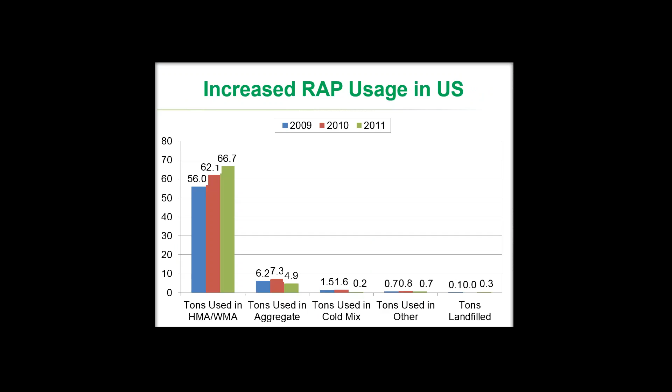The question that, as pavement professionals and decision makers, we need to consider is whether a one-time recycling of that material into the asphalt mix stops us from continuing to recycle that mix back into warm mix products as we talked about. Can I run that material in 10, 15, 20, 40 years back through an asphalt plant without problems? That's one of the main considerations we need to look out for in those few cases where recycling is not the best idea.

There is work out there looking at substitutes for petroleum asphalt, and I think a key thing is that in most cases these are not substitutes, but they're being looked at as asphalt extenders - things we would mix with the asphalt to improve the properties and reduce the amount of petroleum in the asphalt binder.

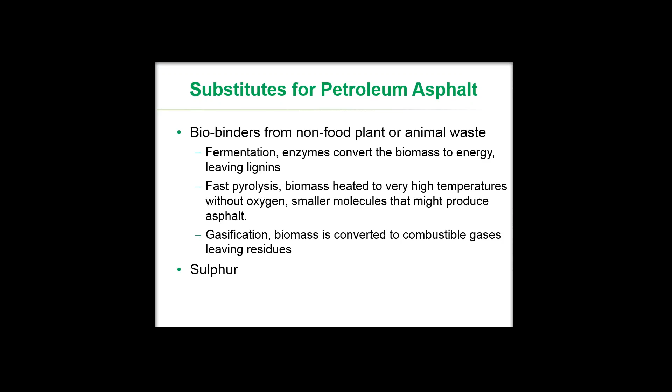These primarily are biobinders from non-food plant or animal waste, using fermentation, fast pyrolysis, and gasification processes. Each has its own environmental impact. There's a lot of work going on out there, so this is something to keep an eye on in the future. There's also been work off and on over the last 20, 30 years with the use of sulfur as a substitute or extender for petroleum asphalt.

So some strategies for improving the sustainability of asphalt mixes - and I've put these in sort of my opinion of rank order, other people may have other opinions - first of all, increase the material performance and the time between future maintenance and rehabilitation treatments. If we can extend the life of an asphalt pavement or mixture through materials design and particularly construction quality, that's an easy way to reduce the impact.

If we can increase the life by 20%, that means we reduce the amount of material we're using by about 20% as well over a life cycle.

The next thing we can do is work to reduce the amount of virgin asphalt binder, aggregate, and polymer in the mix. Use the polymer where it really has a benefit. Use more RAP. Look at recycling tire rubber where it helps us with performance, where we have a net benefit. Consider the use of RAS. Again, use additional additives where the performance increase warrants the additional environmental impact.

As Tom talked about aggregate, the same is true for asphalt mixes - reduce the materials transportation. Use locally available materials where we can get similar performance, or where we can find a way to offset a reduction in performance through our pavement design or how we're handling and designing the materials. Also look at in-place recycling, which eliminates most of the materials transportation impact.

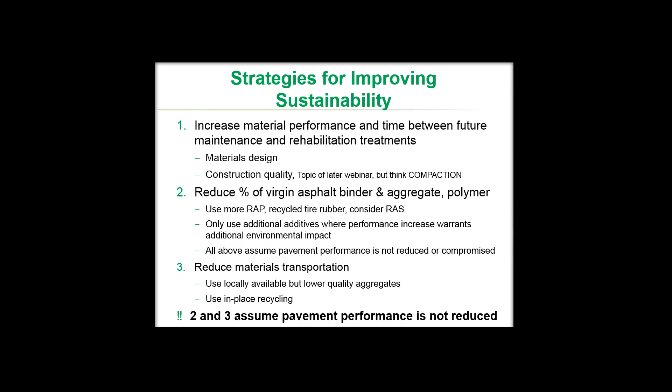Some real-world considerations: understanding the sustainability goals of the organization. An example was given for the Illinois Tollway - they set some clear goals for what they were trying to do. There's a number of impact categories, environmental impacts, that you can consider.

Once you define that, then look at the trade-offs to reduce impact, taking into account that life cycle consideration. So we need to consider the environmental impacts of material decisions, the effects on performance, the replacement frequency, transport distances, and our ability to almost perpetually recycle many of those materials.

A question to ask: are our current specifications limiting the use of lower impact materials? Are we really getting an improvement in performance, or are we setting high specifications for some of these materials where the overall impact on performance is not that great, but we could actually have a pretty good impact on sustainability?

So reviewing specifications and design procedures to look at where you can change those with minimal impact on performance, but potentially allowing greater use of recycling and locally available materials.

Our next subject is going to be pavement design, looking at pavement design so that we can make the best use of the lower impact materials without compromising performance.

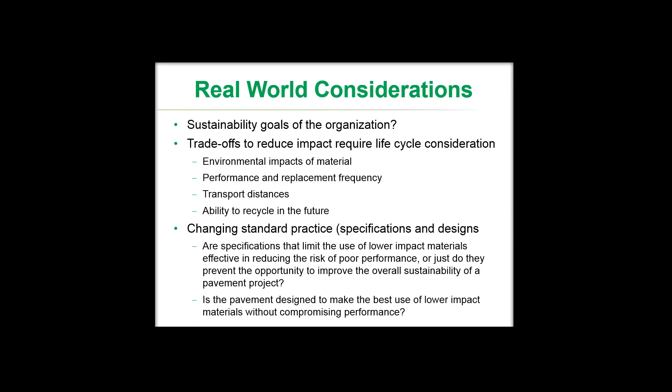An example of this, not necessarily a typical example but just an example, is a state agency with a mix design procedure intended to minimize the risk of rutting by keeping the binder contents low. The question evaluated here was: what's the impact of changing the gradation and increasing the binder content in the mix design to increase the cracking resistance, and therefore increase the amount of time between needing to do preservation treatments or rehabilitation?

So performance-related testing was used to evaluate the stiffness, the fatigue cracking resistance, and the rutting resistance of using the same materials but changing the mix design.

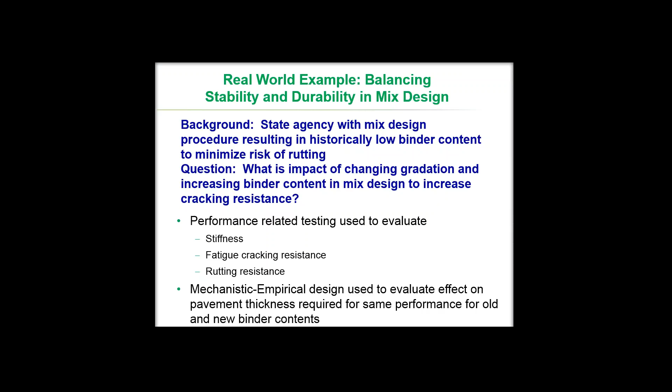Mechanistic empirical design was used to evaluate the effect on pavement thickness required for the same performance, comparing the lower binder content under the old mix design system with a somewhat higher binder content under the new mix design specifications. The result was that the risk of rutting was increased, but it was way over-specified previously, and the risk of rutting was still acceptable with the increased binder content in general.

However, by increasing the fatigue resistance of the material, we could reduce the thickness and still get the same cracking life. So the question was, what's the net impact of increasing the binder content but being able to design a somewhat thinner pavement? By increasing the binder content from 5 to 5.5%, the mechanistic design indicated that we could reduce the thickness.

There were a number of examples run, but for an example pavement, the thickness went from 4 inches (103 millimeters) to about 3 and a quarter inches (84 millimeters) - about an 18% reduction in thickness. This overall reduces the amount of mix needed, and even though we increased the binder content, the total amount of binder needed was reduced from 44 cubic meters to 36 cubic meters. So this is the kind of analysis where you may get a result you were not necessarily looking for.

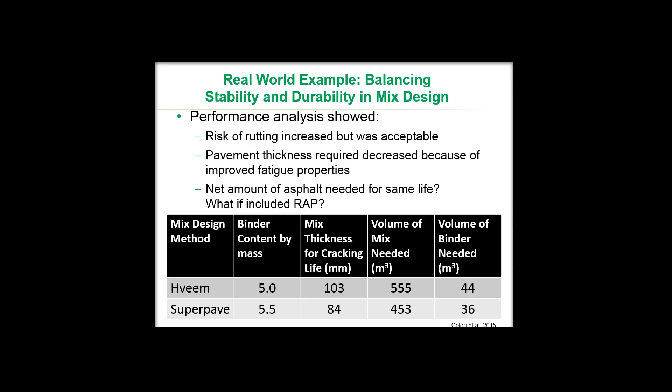Some future directions and emerging technologies: we're expecting a reduction in material quantities used per year through improvements in mixture design and construction practices, new technologies like warm mix, and the strategic use of polymers, rubber, and other modifiers, increased use of performance-related testing and specifications to fine-tune these mixes, greater use of recycled materials particularly RAP, greater use of locally available pavement materials, and longer term, the potential for use of alternative binders.

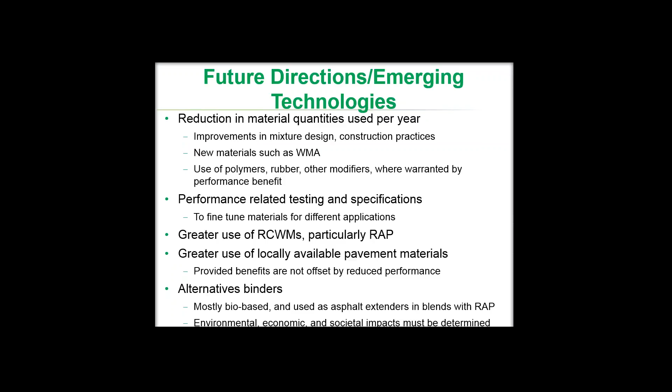Switching subjects to pavement design. Some of the key issues are surface performance, particularly smoothness, which affects vehicle fuel use and maintenance, and has very big cost implications as well as environmental implications. We need to consider life cycle smoothness, not just initial smoothness, and the importance of smoothness increases as the amount of traffic using the road increases.

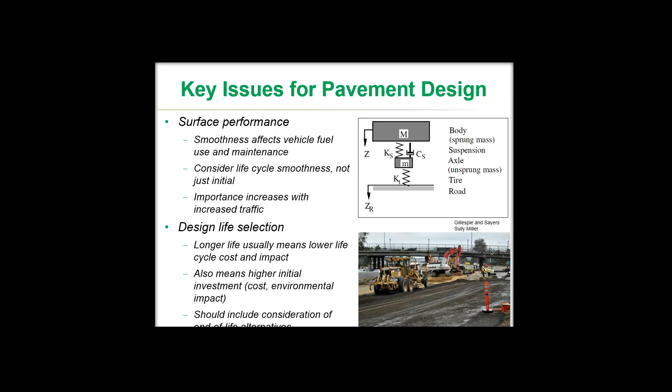Another issue is design life selection. Longer life usually means lower life cycle cost and impact, but that should be evaluated depending on the context. It also means a higher initial investment in terms of cost and environmental impact, and we should consider some different end-of-life alternatives as well - what are we going to do with the pavement when we reach the end of that life?

Pavement type selection is an issue. It impacts every phase of the pavement life cycle. We need to look at the relative sustainability of different pavement types, which depends on the location, the traffic, and the available materials. We also need to look at the interaction of construction and material selection with pavement design, considering designing so that we can maximize the probability of getting high-quality construction.

There will be some discussion about work zone traffic delays, and then integrating our pavement design with our construction quality requirements, and thinking again about how do we account for end-of-life recycling strategies in our initial pavement design.

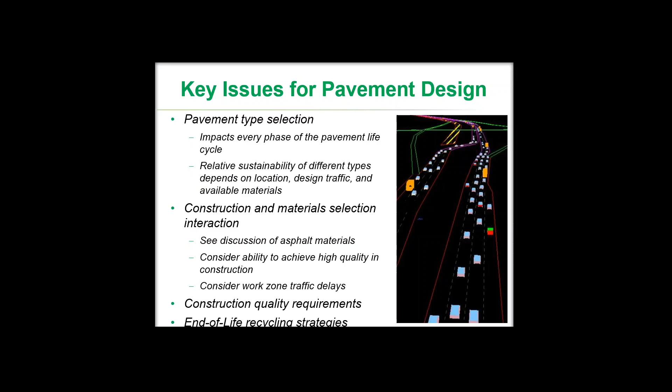Mechanistic empirical design methods really give us a leg up on being able to do relatively rapid evaluation of all the different things we've been talking about with regard to materials as well as pavement design. We can characterize materials with increased recycled content, lower environmental impact, changes in mix design as in the example we just looked at, use of locally available materials - characterize those materials, run them through the mechanistic design, and get a first idea of what the impact is going to be on performance.

We can similarly characterize materials with improved construction quality, such as better compaction, reductions in variability, and making sure we get good bonding between the layers, and evaluate those impacts of changes in specifications. We can also look at different kinds of pavement structures and fine-tune our pavement structures for the specific climate, traffic, and subgrade we're dealing with on a given site.

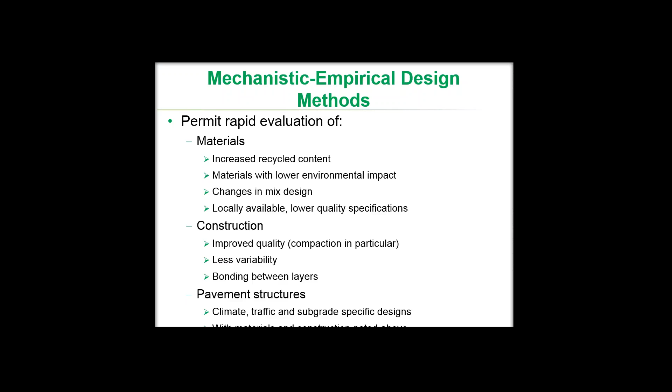One of the things we should consider has to do with pavement life selection. This was an analysis looking at a current 20-year design standard going to a 40-year design standard, and just for analysis purposes, going to a 100-year pavement. This is some of the analysis that can be done looking at things that have a higher initial impact, and then trying to understand how long it takes to get back to the same point in terms of impact as if we had done something with a lower initial impact.

In this case, the 20-year design had a lower initial impact, but the analysis showed more frequent maintenance and rehab resulted in, over the longer life cycle, a much higher environmental impact. The 40-year design had a reduced environmental impact, shown in red, and that paid back after a relatively short amount of time. The higher initial impact of the 100-year pavement didn't really get paid back until way out in the future, which decreased the chance that we were actually going to get a payback.

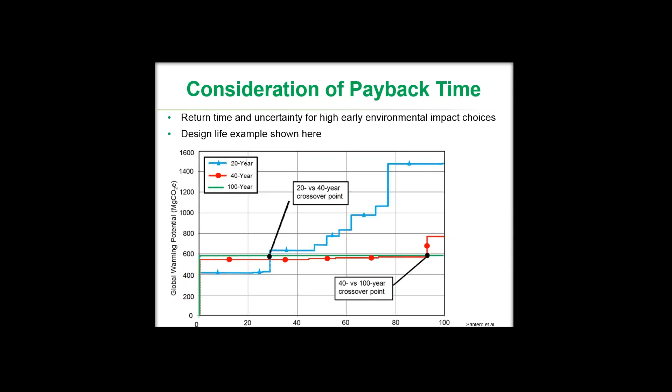So the point is that different changes can be looked at in terms of initial impact versus life cycle impact. The overall process for considering sustainability in pavement design is outlined in the reference document - I'm not going to go through all the details. The basic first part here is basic mechanistic empirical design.

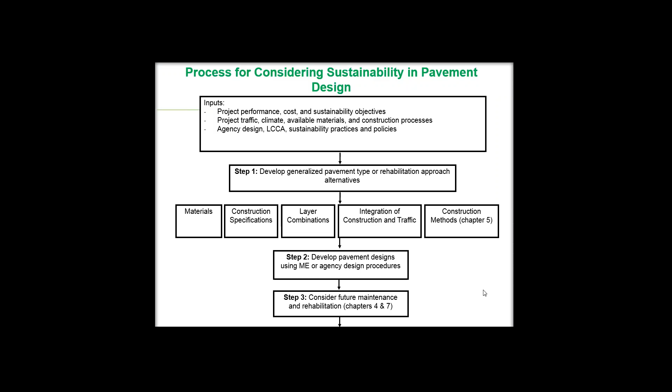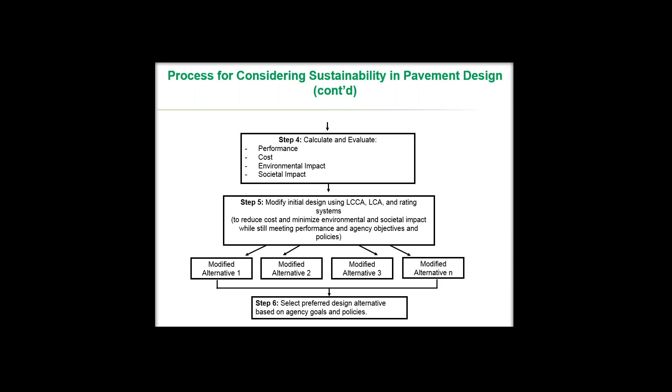The next step is to, based on the structure that you're evaluating, determine the life cycle cost, select your pavement design, and then go through alternatives for optimizing the environmental impact. The general recommendation is similar to what the Illinois Tollway was shown to be doing: focus on your cost first and then optimize your environmental impact to arrive at the final solution.

There's a number of different pavement types, I'll just go through a few of these. All of these are alternatives that can be considered, each should be looked at in terms of potential trade-offs. We have full depth asphalt, where all of the layers are asphalt bound on a compacted subgrade, versus a conventional asphalt pavement, where we're using granular layers to help carry the loads. An example of trade-offs: full depth asphalt uses a higher impact material for most of the structure, but we can potentially reduce the overall thickness of the pavement substantially, which may result in a net benefit in terms of environmental impact.

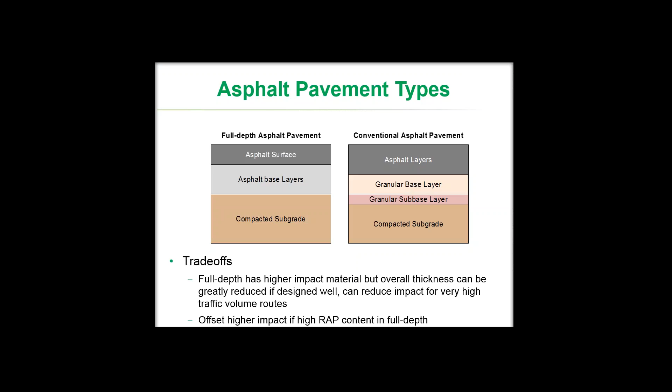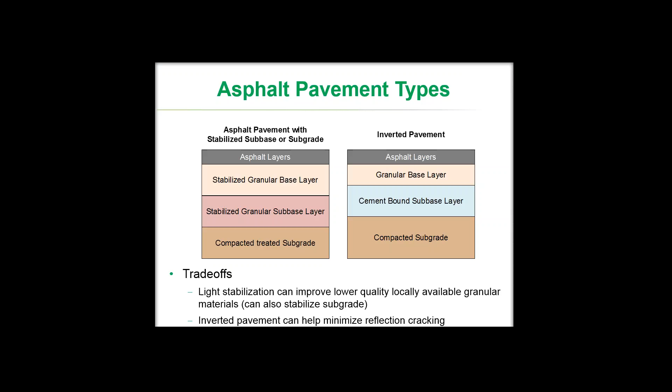If we're using full depth asphalt as an example, we might be able to offset a greater amount of that impact by using a high RAP content in the deeper layers of the structure. Some other types of pavements we can consider: light stabilization, as shown on the left, which can substantially improve the performance of the aggregate layers under the asphalt. We can cement treat the materials and then use a granular base, called an inverted pavement, used quite a bit in Southern Africa and some other locations.

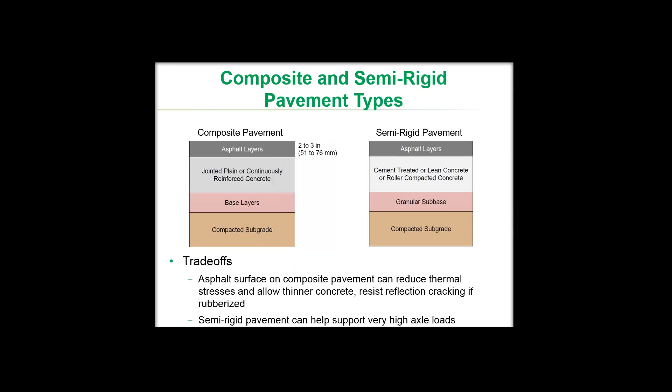We can use composite pavement as a new pavement structure, where we build a concrete pavement and then use asphalt on the surface, which can help us thin down the concrete. This is the subject of research in the SHRP R21 project. Or in many countries, or cases where we don't have a lot of access to good crushed aggregate materials, we can use semi-rigid pavement, where we cement stabilize the base and then use asphalt layers on the surface, which can also help us thin the pavement down for very heavy axle loads.

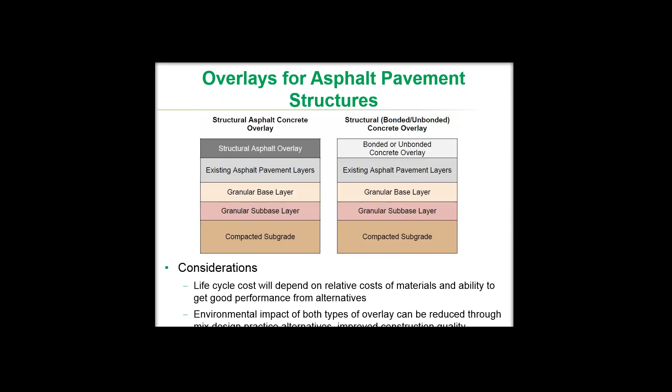Looking at rehabilitation, most of the time on asphalt pavements we're doing structural asphalt overlays. We can also overlay with concrete, bonded or unbonded concrete overlays; generally we're going to use a bonded concrete overlay on asphalt. We need to compare the life cycle costs for these, compare the environmental impacts for each of these, and look at alternatives within each strategy to reduce the environmental impact.

Our surface choices, again, we're primarily looking for rut resistance and skid resistance. In our design process, we can consider the use of dense graded asphalt concrete. We can look at high friction materials such as chip seals and microsurfacings, primarily used as preservation. One thing to think about: recent work considers non-motorized users for some of these surfaces as well.

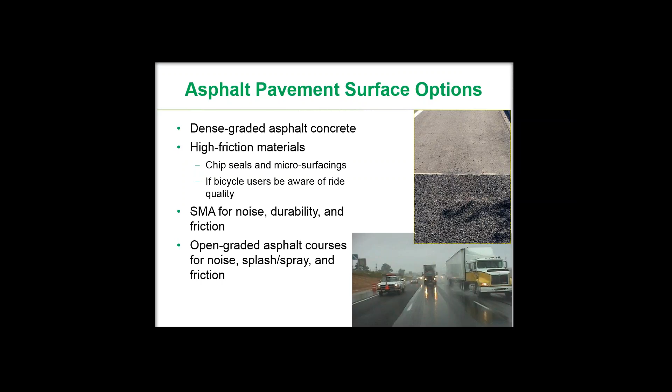SMA can be used for noise, durability, and friction. We can also look at open graded asphalt courses for noise, splash and spray, and friction. We can see on the bottom right, on the left-hand side, an open graded asphalt dropping the water off the surface, and a dense graded asphalt on the right where the water has to flow across the asphalt, with a reduction in spray occurring from using the open graded asphalt. There have been a number of improvements recently, and upcoming, in open graded asphalt mix design to improve their durability.

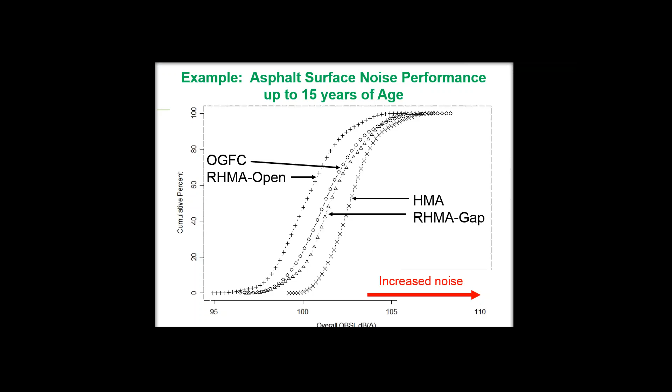This is an example of asphalt concrete tire pavement noise performance. On the x-axis we have the onboard sound intensity in decibels, with noise increasing to the right. This looks at the performance of about 60 surfaces over 15 years. We can see that dense graded asphalt has higher noise, but we can reduce that noise quite a bit by going to open graded friction courses. We get some improvement even from gap graded rubberized mixes, and in this study the best performer was rubberized open graded mixes, which maintain their durability and keep that noise benefit for quite a while. This is an example of the type of thing that can be evaluated.

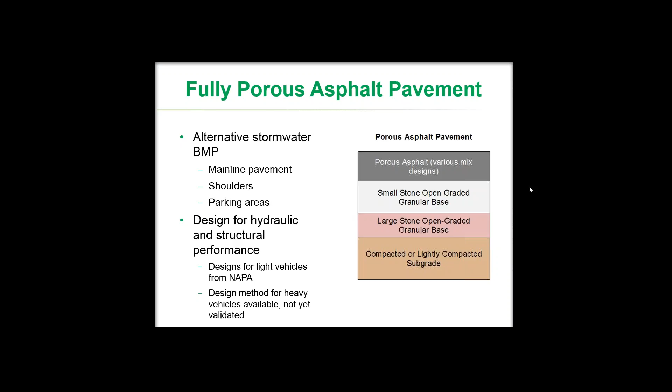An alternative primarily used right now for parking areas and low traffic vehicle pavements is porous asphalt pavement. In porous asphalt pavement, we are making all the layers in the pavement permeable, not just the thin open graded layer on the surface—the asphalt itself is permeable. We then have open graded granular layers where we can store the stormwater and then infiltrate it.